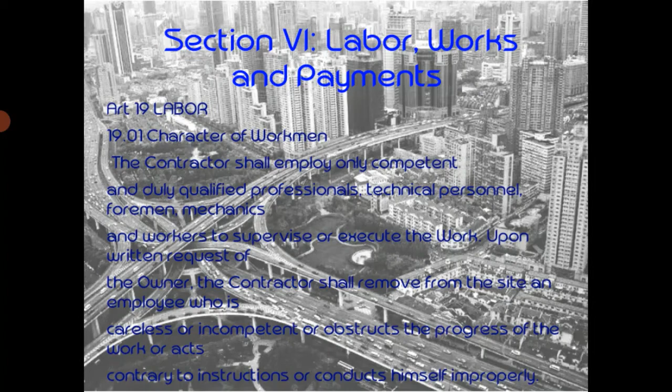Next, Article 20, which is Work. Article 20 is divided into many parts. The first one is methods and appliances. The contractor shall use such methods and appliances for the performance of the work as will ensure completion of the work of the required quality within the completion time.

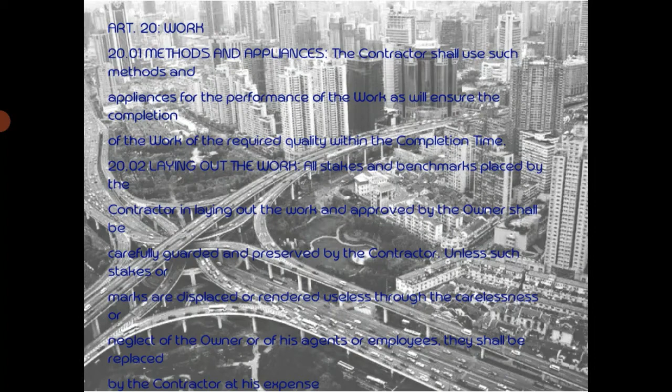Next, Defective Work. What is this defective work? Defective work that fails to comply with the contract is defective. Defective work shall be condemned by the owners upon discovery, and when such work has been condemned, it shall be immediately removed by the contractor and replaced in accordance with the drawing and specification.

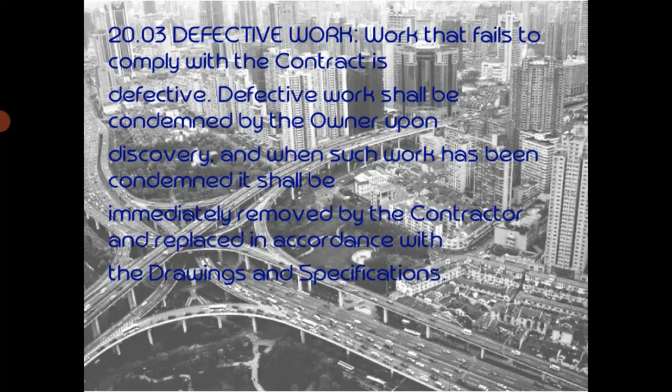And after those, we come now to the inspection of work. Paano yan nag-work na inspection?

The owner shall have access at all times to the work. The owner shall provide a sufficient number of inspectors while work is in progress to ensure its timely inspection. So, ang owner daw yung may nagpapagawa, may access siya sa lahat ng oras sa patrabaho. Siya rin ang magbibigay ng mga inspector para ma-check kung tama ba yung process na ginagawa ng contractors o kung walang corruption na nangyari. Owners na din ang may rights na gawin yon.

Letter B. The contractor shall furnish without additional charge all reasonable facilities, labor, and materials necessary for the convenient inspection and test that may be required by the inspectors. So, kung yung binigay ng owner na mga inspector, pag may na-request yun sa isang contractor na itong dapat gawin, ang contractor ay dapat sumunod doon at kailangan dapat mag-comply.

Okay, next. The owner shall provide inspector authorized to witness the pouring of concrete. So, another responsibility ng owner, mag-provide siya ng inspector para tingnan yung tama ba yung pagkakahalo or pagkaka-ratio ng aggregate, cement, and water para ma-ensure yung stability ng isang structure. Because in our calculation, right amount of ratio is very important in acquiring specific strength. So, it should be observed.

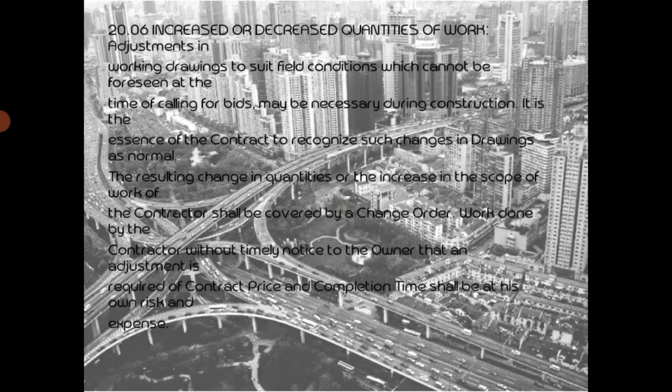But the contractor shall be covered by a change order; work done by the contractor without timely notice to the owner that an adjustment is required of contract price and completion time shall be at his expense. So, pananagutan na naman yung contractor. Kaya dapat mag-ingat yung mga contractor.

20.07 is part of Article 20 pa din, which is focus on work. Changes in the work. Letter A. Changes ordered by owner. The owner may at any time order extra work or make changes by altering, adding to, or deducting from his scope of work and within the general scope thereof, provided, however, that the resulting overruns or underruns from the quantities or cost in the bid do not exceed 25%. Such changes shall be ordered by the owner in writing.

For example, yung owner may gustong ipagawa sa isang project, but it is already done or nabid na, gagawin na. Kung may changes man doon ay gustong ipagawa yung owner, hindi dapat siya lalagpas sa 25%, dahil pag lumagpas siya, kung tumagal man yung project because of the owner, siya ang may responsibilidad dito.

Next. Letter B. Change of subsurface condition. If during the progress of the work, subsurface condition at the site materially different from those shown on the drawings or indicated in the specification or in any contract document are discovered or encountered, the attention of the owner shall be called to such condition before they are disturbed.

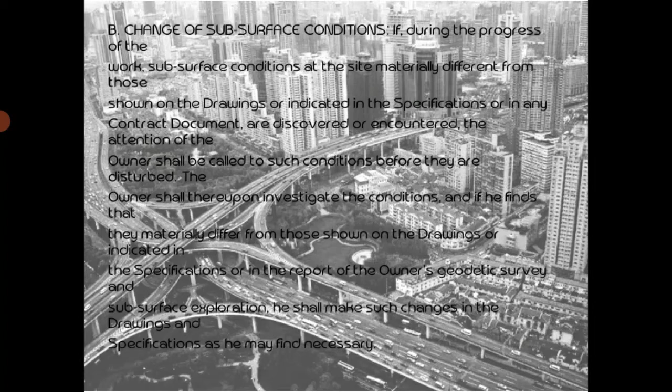For example, sa isang construction may papalitan or may kailangang ayusin, ang contractor ay dapat in-inform palagi ang owner about doon. Kung hindi ma-inform at may magastusin doon, ang contractor pa din ang responsibility at siya ang magastos nito.

C. Adjustment of contract. The work shall be executed under the condition of the contract.

If changes under paragraphs A and B shall cause an increase or decrease in the amount due under the contract, or in the time required for performance, an equitable adjustment shall be made and the contract modified accordingly. In the event that the work is increased by such changes, the contractor shall furnish proportional additional performance bond.

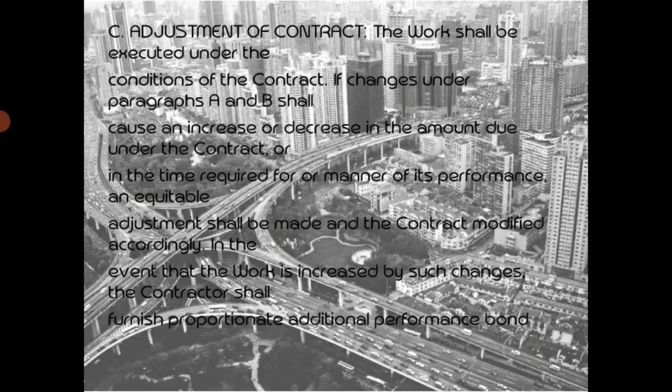Okay, when there's an adjustment of contract, it is clearly stated there that it should follow the conditions. As I showed earlier, the owner needs to be informed.

Next is the value of extra work. The value of any extra work or change shall be determined by the owner in any one or more of the following ways.

So there are extra works called additional services given by the contractor on a project. But they can only be paid if determined by the owner through a lump sum acceptable to the contractor, by unit prices either stipulated in the contract or subsequently agreed upon, provided the aggregate value of changes does not exceed 25% of the original contract price of the particular pay item. I mentioned this 25% earlier - it should not exceed that so changes made to a project don't double. Or by actual direct cost plus value added tax, if any, plus 15% for contractor's profit and overhead.

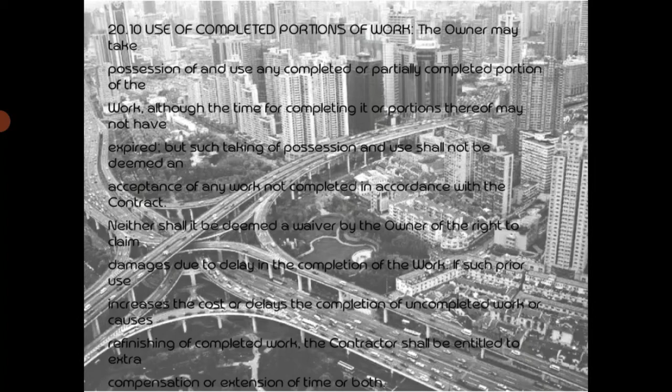For example, yung project is almost done, matatapos na. Ang owner pwede siya mag-request kung pwede na gamitin yung kwarto for specific purposes nila. For example, yung building, kailangan na nilang gamitin but hindi pa siya totally tapos. Pwede mag-request yung owner, but hindi dapat maapektuhan nito yung progress ng isang proyekto na hawak ng contractor mismo.

Next is 20.11, parts pa rin to ng work. Substantial completion and its effect. There is a substantial completion when the contractor completes 95% of the work. So matatawag na substantial completion ang natapos ng isang contractor kung 95% na ito ng plano. Madali na siya matapos, 5% na lang hindi pa natatapos.

So of the work, provided that the remaining work and the performance of the work necessary to complete the work shall not prevent the normal use of the completed portion. So as I mentioned earlier, kailangan hindi maapektuhan yung progress pa din ng tinatapos yung project, hindi maapektuhan ng na-occupy na ng owner yung isang building.

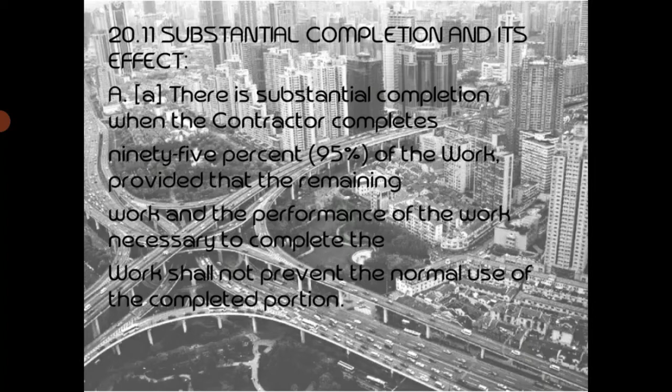Letter B, the approval by the owner of the contractor's billing for completing at least 95% of the work shall be deemed the owner's acknowledgement that the contractor has substantially completed the work, unless the owner can establish that the unfinished work prevents the normal use of the completed portion. It has the same idea.

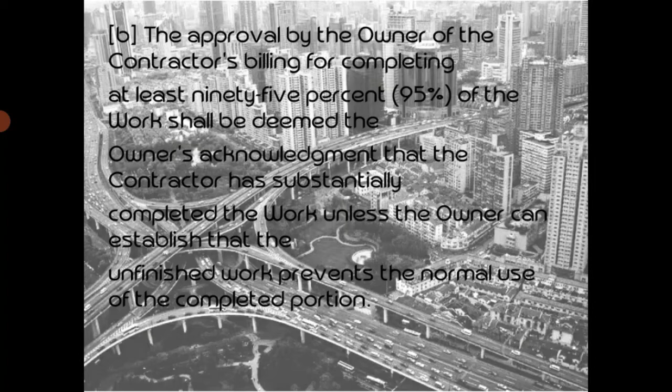C, the owner may also issue to the contractor a written acknowledgement of substantial completion, which may be in the form of certificate of substantial completion or equivalent document, but the date of this document shall not be controlling if substantial completion is shown to have been made at an earlier date, unless the contractor accepts the certificate without taking exception thereto in writing within 15 days from receipt.

Self-explanatory. Next.

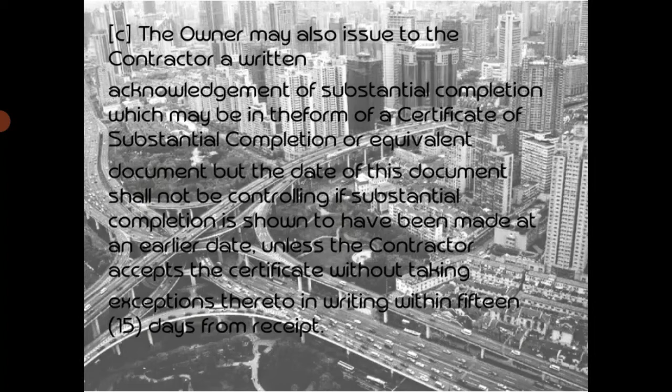Notwithstanding paragraph A, or yung kanina, the above equipment, fixtures, and utilities, collectively the facility furnished and installed by the contractor which the contract requires to be test run prior to acceptance, shall be test run successfully before the work can be accepted as substantially completed.

For example, sa isang project, building, kung may mga tubo man yun o kaya mga electrical wirings, kailangang matest muna yun. Or for example, yung isang project matatapos na at naka-install na doon yung electrical wirings, yung mga different fixtures, pero hindi pa natetesting. In order to consider na 95% completed na yung isang work, it should be working. Yung lahat ng electrical, yung pipings, kailangan nag-work siya ng tama para ma-considered as substantial completed.

Letter B, the owner shall without delay cause the test run of the facility. Should the contractor be unable to completely install or furnish and test run the facility through no fault of his, the contractor shall automatically be entitled to an extension of completion time equal to the period of delay. Same idea with letter A. Yung owner magpapatest na pero hindi dapat siya makaka-delay ng work.

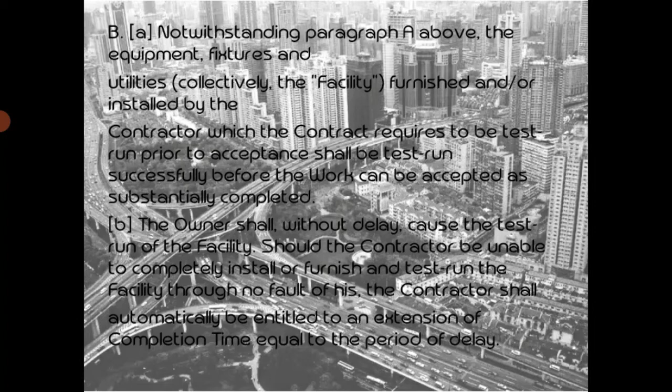Okay next, the owner shall issue the contractor one or more list of defects found or discovered in the completed work, otherwise known as a punch list, which the contractor must receive from the owner not later than 30 days from date of substantial completion. So for example, 95% na yung natapos and then may nakita yung owner na palpak sa ginawa ng contractor at hindi ito na-report sa loob ng 30 days. Pag lumampas ng 30 days, hindi na siya tatanggapin ng contractor o ang owner na mismo yung magpapagawa noon kung may mga depekto man na nakita sa project.

Letter B, the owner may add to the punch list items but only as to corrective work on the items in the original punch list, not later than 60 days from date of substantial completion. So pag may nakorek na yung owner, may kinorek man yung owner sa hindi na pinagawa ng owner sa contractor yung mga mali, tinama na yun ng owner. So within 60 days dapat may report yun sa contractor para maybe yung expenses ay ma-covered pa din, para mabawi ng owner maybe.

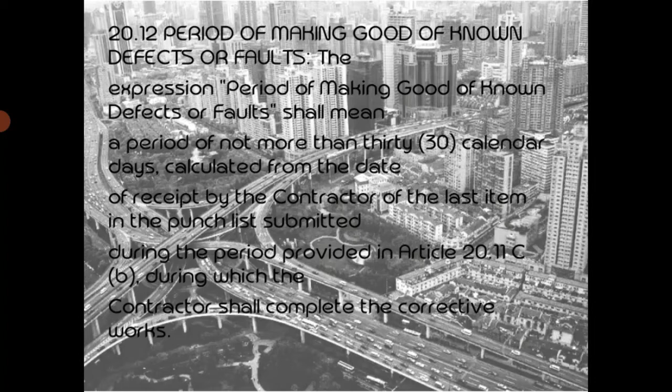20.13 Making good of known defects or faults. The contractor shall execute at his own expense all works necessary for making good of known defects, imperfections, or faults, where and thereafter accepted within the period stated in Article 20.12. So, para makakuha ng mas magandang result, responsibilidad ng contractor na mag-add ng effort para maiwasan ang depekto at makuha ang magandang kalalabasan ng isang project.

20.14 Special test and inspection. Special test, inspection, or approval not otherwise required in the contract, which the owner instructs the contractor to perform after the date of substantial completion, shall be treated as a separate work covered by a supplemental agreement. So maybe yung dun sa 95% na yun, yung pag-test ay hiwalay na siya sa usapan ng isang kontrata. Hindi na involved sa contract yung ganong pagtetest. Kailangan magkaroon ng supplemental agreement muna para sumunod yung contractor na mag-test at mag-inspect sa isang project. Kinakailangan pa rin na may agreement.

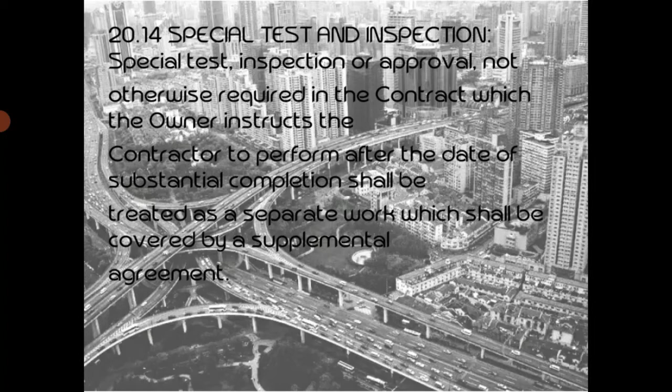20.15 Acceptance of non-conforming work. If the owner accepts defective or non-conforming work instead of requiring its removal and correction, the owner shall issue to the contractor a change order to reflect a reduction in the contract price, where appropriate, by an amount not exceeding the value of unfinished work as determined in the breakdown of work. Napakadaling intindihin: kung ang contractor ay may nagawang mali o hindi tama, okay lang na ang owner ay hindi na magpilit na papalitan pa sa contractor yung ginawa nila. Sa halip, babawasan na lang ng owner yung bayad sa contractor. Kailangan mag-ingat ang contractor para masigurado ang good quality of work, para maganda rin ang payment.

20.16 Adjustment of prices. The adjustment of prices shall be determined on the basis of the original contract unit prices of labor and materials, and such unit prices in effect during the relevant period of work accomplishment. The contract price shall be adjusted not oftener than once a month due to increase or decrease of the direct cost of labor and materials of more than 5% of the original contract unit prices of the relevant item of work. The adjustment shall include the first 5%.

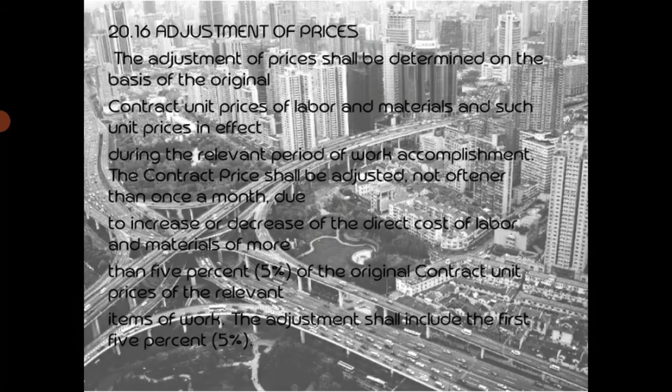20.17, payment and legal tender. Payments and money under the contract shall be made in the currency stipulated, and if it is not legally possible to deliver such currency, then in the currency which is legal tender in the Philippines. Understood, self-explanatory. So we come now to Article 21, the time of completion of work.

Notice to proceed when required. A notice to proceed shall be issued by the owner to the contractor only when the contract so provides. Premature commencement of construction shall be at contractor's risk, unless it is due to their mutual desire to have the contractor commence the work early and the owner gives the contractor express or implied authority to do so.

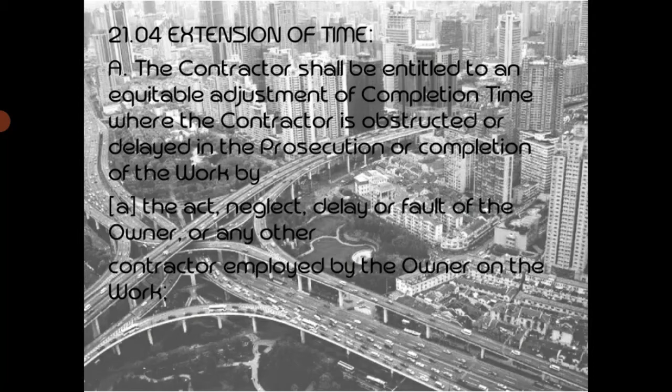Letter C, an act of God or force majeure. Unsuitable weather condition which render the work impracticable or impossible, or which slow down the prosecution of the work. For example, may bagyo sa isang project. Pag may bagyo, hindi naman pwedeng gumawa yung mga worker. Pwedeng mag-endanger na yan sa kanilang buhay.

So accepted sa isang contractor na ma-delay or ma-extend yung project. But nowadays, as I observe, nagkaroon ng pandemic but the construction is still working. Hindi pa rin yun nadidelay, patuloy pa din yung mga pag-build. Yung project ngayon, project ni Duterte na build, hindi yun nadidelay. But another weather condition, yung typhoon, lindol, acceptable doon para ma-extend yung project.

Peace and order condition. What is this? For example, may war, may giyera sa isang lugar. Nandun yung project mo ng contractor, madidelay yun. Hindi naman pwedeng makipagsapalaran yung mga worker doon sa site na may nagkakaroon ng giyera. Endanger yung life nila doon. Pwede rin ma-extend yung completion time.

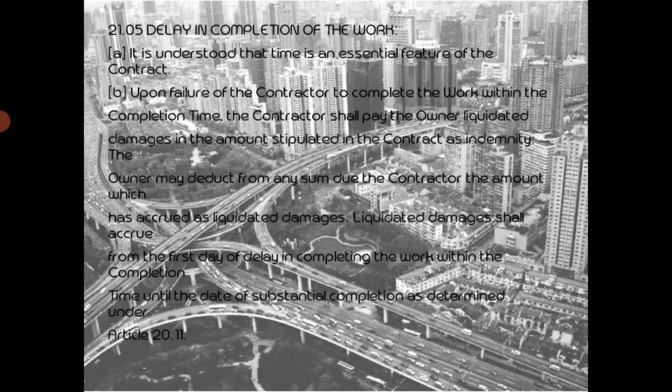Owner may deduct from any sum due to the contractors the amount which has accrued as liquidated damages. For example, na-delay yung oras ng completion time, yung owner, yung ibabayaran niya, yung minus niya na yun sa babayaran niya sa contractor. Yun yung isa sa mga consequences kapag hindi natapos yung completion time. So okay, understood na yung sa baba.

Next, Article 22. This is the last article covered in section 6, which is labor payments. Payments.

Breakdown of contract amount. Except in cases where unit prices form the basis for payment under the contract, the contractor shall within 15 days from the receipt of notice proceed. So parang naka-anchor din dun sa mga past topic nito, yung dapat 15 days kung may binili man yung isang contractor na materials or additional na expenses doon sa isang project, kailangan within the 15 days yung resibo niya ay may pakita niya sa owner mismo para ma-refund yun ng owner at maging considered na additional payment niya ng owner sa contractor.

22.02, request for payment. The contractor may submit periodically, but not more than once each month, a request for payment for work done. Importante din to pala. So every month, yung natatapos doon, kailangan palang bayaran na ng owner. But in order to pay that by the owner, the contractor is required to submit a payment request to the owner sa natapos na trabaho.

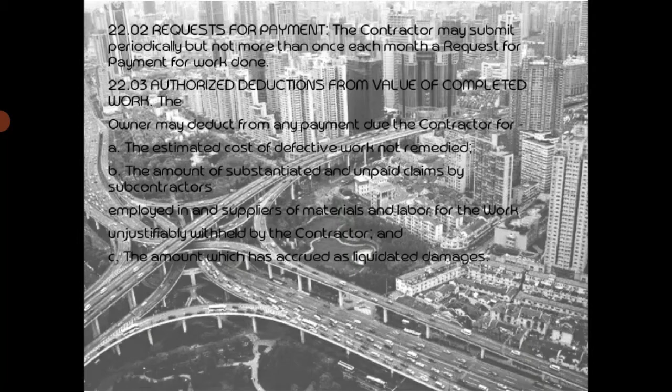22.03, authorized deduction from value of completed work. The owner may deduct from any payment due to the contractor for the estimated cost of defective work not remedied, the amount of substantiated and unpaid claims by the subcontractors, the amount which has accrued in liquidated damages. So ang pwedeng ibawas ng owner yung babayaran niya sa contractor kapag may mga depektong sa nagawa yung contractor sa project na hindi naman ginawa ng paraan para ayusin. Ibabawas yun ng owner na payments niya equivalent in terms of money, para sa cost na nagawa ng contractor.

22.04 Conditions relative to payments. The owner shall estimate the value of work accomplished by the contractor using as basis the schedule stipulated in the breakdown of work and corresponding value. Such estimate of the owner of the amount of work performed shall be taken as the basis for the compensation to be received by the contractor.

This is the responsibility of the owner, which is estimating the cost of his or her project that is given to the contractor. So, they compute that and then it gets paid to the contractor. And separate from this is the discussion on defects, which I already mentioned earlier.

22.05 Owner's action on request for payment. Within 30 days after receipt of request for payment from the contractor, the owner shall pay the amount as certified. The 30-day period shall be inclusive of the period required in evaluating and certifying the contractor's accomplishment. So within the 30 days, the owner will check and compute the expenses, how much should be paid to the contractor.

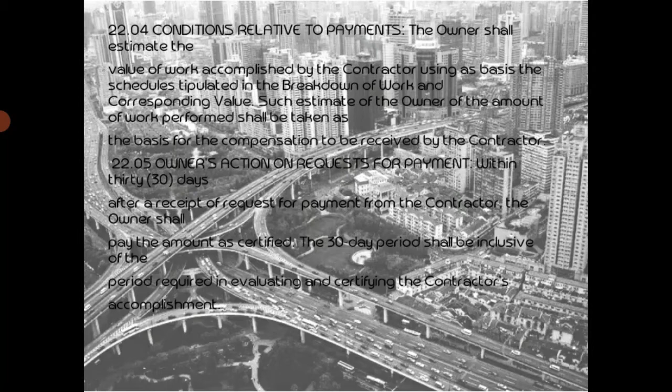If this is not fulfilled within 30 days, maybe the contractor can file a case against the owner because they failed to comply with the 30-day rule and regulation that they should know regarding payment during that time. Next is 22.06, payment of unpaid labor, subcontractors, and suppliers.

The contractor shall pay punctually all workmen employed by him on the project at not less than such rates as provided by existing laws. He shall also pay promptly all materials purchased by him, equipment used by him on the project, and all taxes due from him. He shall remit as required by law all amounts legally required to be withheld from the salaries of employees or workmen.

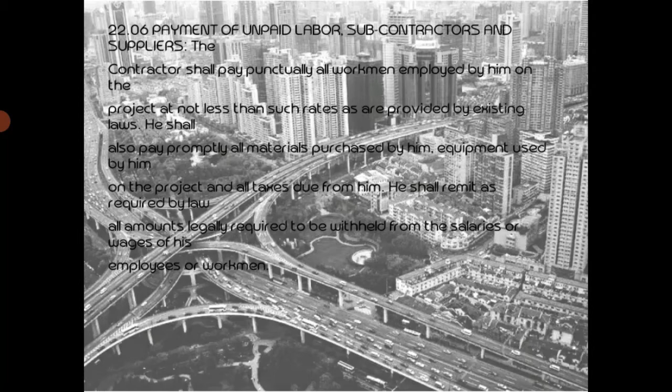22.07 payments over 90%. No payment shall be made in excess of 90% of the contract price unless a statement sworn to before any officer duly authorized to administer oaths is submitted by the contractor to the effect that all bills for labor other than current wages and all bills for materials have been duly paid by the contractor and his subcontractor, if any, excepting only such bills as may be enumerated in such sworn statement.

The contractor shall render the owner free and harmless from any claims and payments of such bills and shall indemnify the owner the cost of defending himself against such claims.

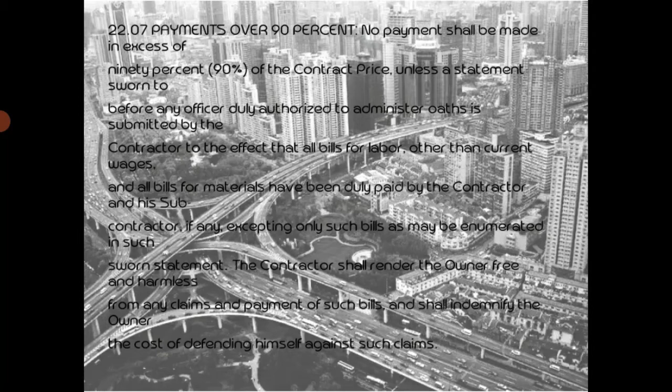Next is 22.08, other requirements before final payment. So here are stated the various requirements for the final payment from the owner to the contractor. The contractor shall submit, aside from those which may be provided in the contract, the following as applicable before final payment is made: certificate of final building occupancy, unless such certificate cannot be obtained through no fault of the contractor. Aside from the certificates already mentioned, the contractor still needs to submit a certificate of final building occupancy.

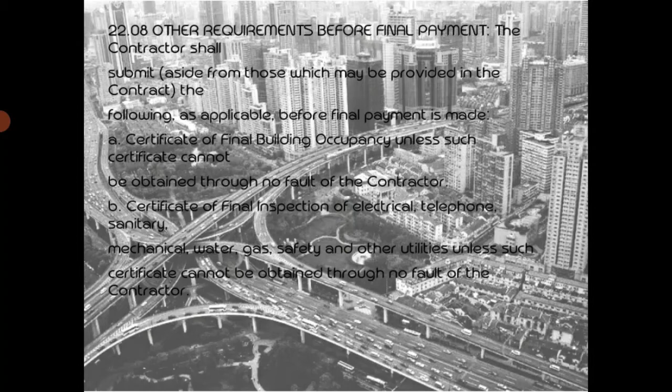So those are still the requirements the contractor needs to acquire in order to be paid by the owner. Next is C, another original and 3 sets of prints of as-built drawings of electrical, sanitary, gas, telephone, and mechanical works, if such works are within the scope of the contract. As-built drawings are the working drawings showing the system and actual location of outlets, fixtures, services, and equipment that were installed.

The plans. 3 copies of directory of panel boards and list of circuits. That's what I meant - there should be copies kept, and the contractor needs to be careful in handling documents so there is future evidence of what should be paid by the owner. So, being a contractor, one should be careful with papers.

Next, 3 copies of instruction and manual for operating and maintaining fixtures and equipment. Next, 3 copies of keying schedule. G, a release of liens arising under the contract as provided in Article 34.01. The sworn statements required in Article 22.07.

22.09 Acceptance and final payment. Whenever the contractor notifies the owner that the work under the contract has been completely performed, the owner shall proceed to verify the work, make the final estimate, certify to the completion of the work, and accept the same. So when the contractor says the project is done, one of the responsibilities of the owner is to check and verify if it's true, and check what needs to be paid to the contractor. Other concerns like defects were mentioned earlier. So this is just to consider the amount that should be paid by the owner to the contractor.

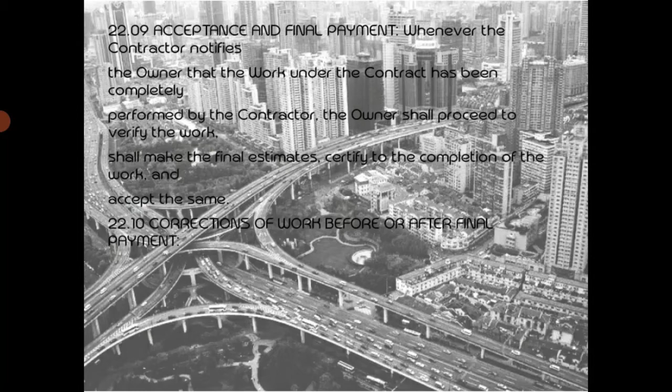22.10 Corrections of work before or after final payment. Before the final payment, if the owner has corrections, they should inform the contractor so the contractor can act on it and know about it. This is connected to the past topics mentioned earlier, like defects - the contractor needs to be informed so they can work on remedies. But if remedies can't be made, that won't be paid by the owner either. That's the last one under 22.

22.11 Release of retention. Subject to Article 33.01 herein, the amount retained by the owner under the provision of the contract shall be released not later than the expiration of the period of making good of known defects as provided in Article 20.12, upon the posting of contractor's bond. The 30 days I mentioned is when the project has already been evaluated by the owner so the cost can be estimated. That's subject to Article 33.01, which will be discussed after this in other reports.

So to sum up, my conclusion is that Section 6 points out the relationship between the contractor and the owner. This involves the labor, the workers, the engineers, and so on. These are the rules and regulations between contractors and owners - what the contractor should follow, and what the owners should follow. Both parties or organizations have limitations to their power. Just because you're the owner doesn't mean you control everything in the construction. And just because you're the contractor doesn't mean the owner has no right to get involved in the work, or that they just pay and nothing else - it's not like that. There are rules to follow, as stated in Article Section 6, which focuses on labor, works, and payments.

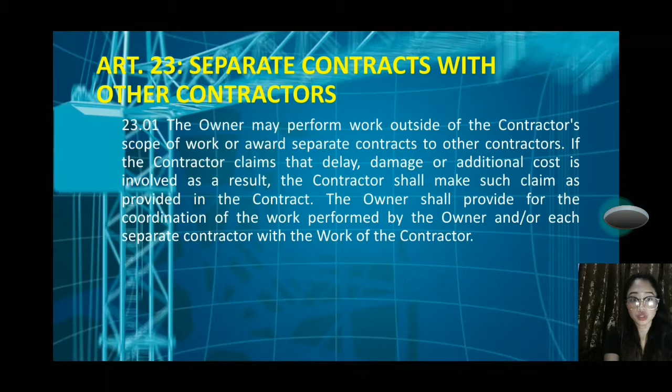Next, Article 24, Contractor, Separate Contractors Relations.

As to storage of materials and work coordination, the contractor shall, to the extent possible, afford other contractors reasonable opportunity for the introduction and storage of their materials and the execution of their work, and shall properly connect and cooperate in the owner's effort to coordinate his work with that of other contractors so as to minimize interference or obstruction in the progress of the work performed by each of them.

Since the owner can have separate contractors with other contractors, kailangan bigyan ng contractor ang iba pang contractor ng pagkakataon para alamin ang mga materyales at bigyan din sila ng storage para sa kanilang materials at pagpapatupad ng kanilang trabaho. Sabi din kailangan makikooperate ng contractor sa owner para maiugnay ang trabaho sa iba pang contractor para sa progress ng trabaho.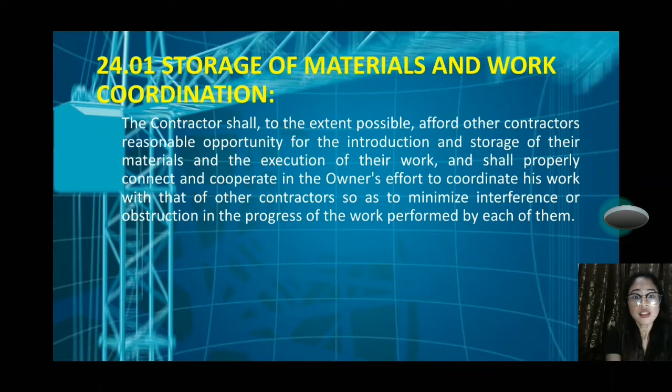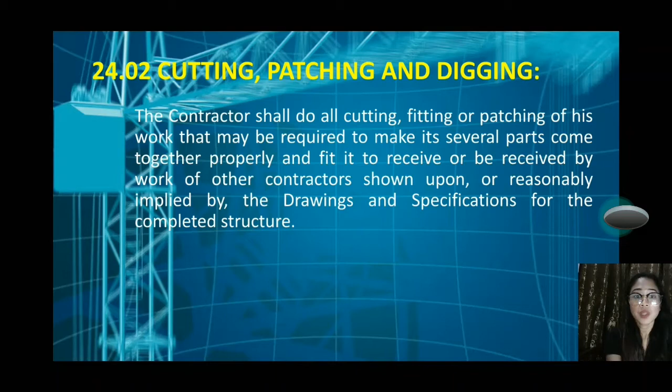As to cutting, patching, and digging, the contractor shall do all cutting, fitting, or patching of his work that may be required to make its several parts come together properly and fit it to receive or be received by work of other contractors shown upon or reasonably implied by the drawings and specification for the completed structure.

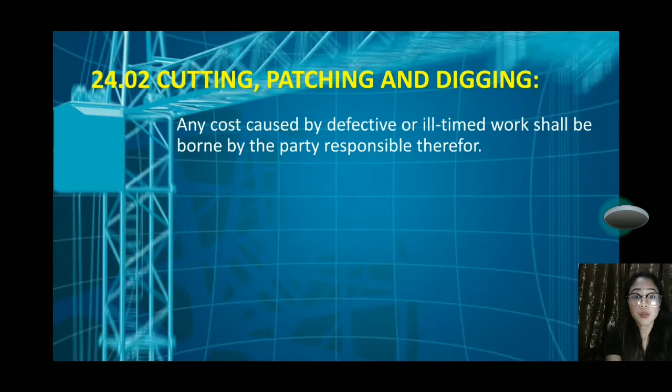Any cost caused by defective or ill-timed work shall be borne by the party responsible therefor. The contractor shall not endanger any work by cutting, digging, or otherwise, and shall not cut or alter the work of any other contractor save with the consent of the owner.

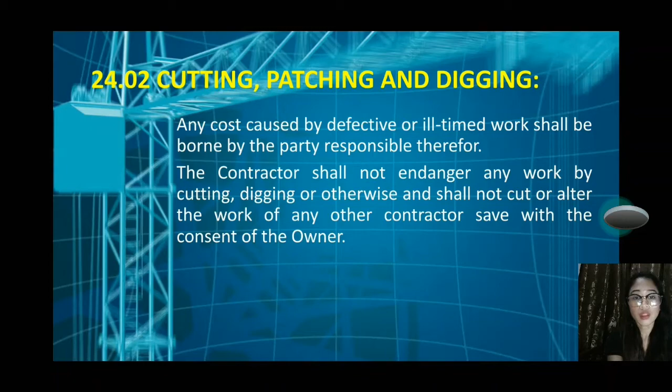Next, defective work by separate contractors.

If any part of the contractor's work depends for proper execution or results upon the work of any other contractor, the contractor shall inspect and promptly report it to the owner. His failure to inspect and report it shall constitute an acceptance of the other contractor's work as fit and proper for the reception of his work, except as to defects which may develop in the other contractor's work after the execution of the contractor's work.

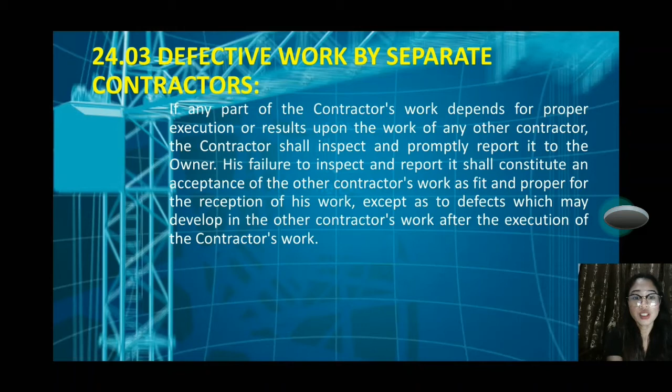To ensure the proper execution of his subsequent work, the contractor shall verify work already in place and shall at once report to the owner any discrepancy noticed between the executed work and the drawings.

Kung ang work ng other contractor ay pwedeng makaapekto sa work ng contractor, kailangan rin i-inspect or i-check nito ang trabaho ni other contractor and shall report it to the owner, lalo na kung may problema sa work ng other contractor. Kasi pag hindi niya ito na-inspect at na-report agad sa owner at nagkaroon ng problema sa work ni contractor, hindi niya pwede ipasa ang mali or problema sa other contractor. Responsibility na ito ng contractor, hindi ng other contractor. Kaya para maging maayos ang execution ng project, i-check din ang work ng other contractor.

Next, damage caused by contractor to separate contractors. Should the contractor cause damage to the work of any separate contractor, the contractor agrees to relieve the owner of any liability which may arise therefrom.

You, as a contractor, kapag may na-damage ka sa other contractors na kinuha ni owner, ibig sabihin, liable ka sa owner kung ano man ang pwedeng mangyari sa work.

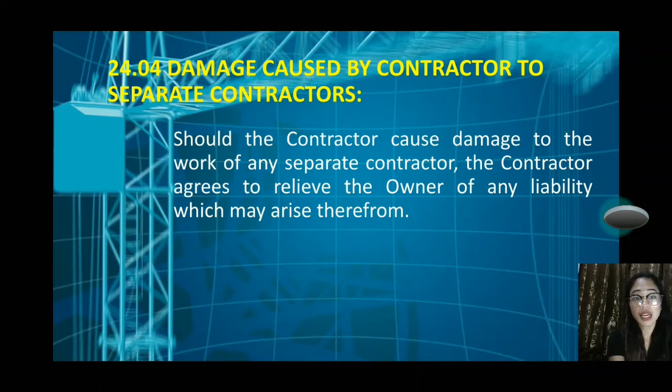Next, damage caused by separate contractors to contractor. Should any separate contractor cause damage to the contractor's work, then the owner shall hold harmless the contractor in respect thereof.

Dito naman, kung ang other contractor na kinuha ni owner ay may na-damage sa work mo, ibig sabihin kailangan hindi ka sisihin ni owner at hindi madamay sa pagkakamali ni other contractor.

Next, Article 25, Subcontracts. General, it is understood and agreed that no portion of the work shall be sublet or subcontracted without the owner's consent.

As the contractor having an agreement with the owner, you cannot pass on the contract to other contractors given to you by the owner without the latter's consent. If ever na pumayag ang owner na magkaroon ng subcontractor, walang contractual relation between the owner and the subcontractor.

Last, contractor's responsibility. The contractor agrees that he is as fully responsible to the owner for the acts and omissions of his subcontractors and the persons either directly or indirectly employed by them, as he is for the acts and omissions of persons directly employed by him.

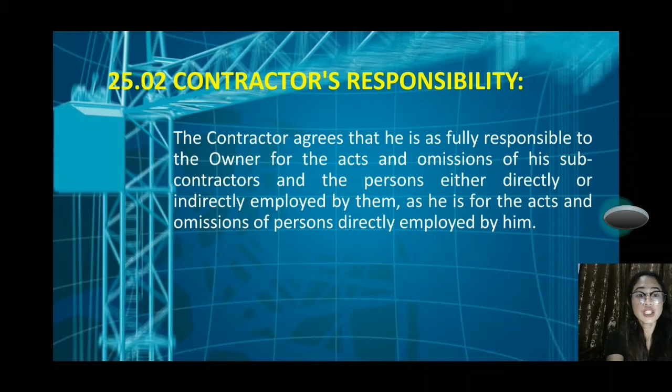Kung magkaroon man ng failure or problem dahil sa subcontractor, responsibility ito ng contractor sa owner since siya ang may agreement sa owner. And that is all for my report for today, and I hope you learned some of the information regarding civil engineering works.